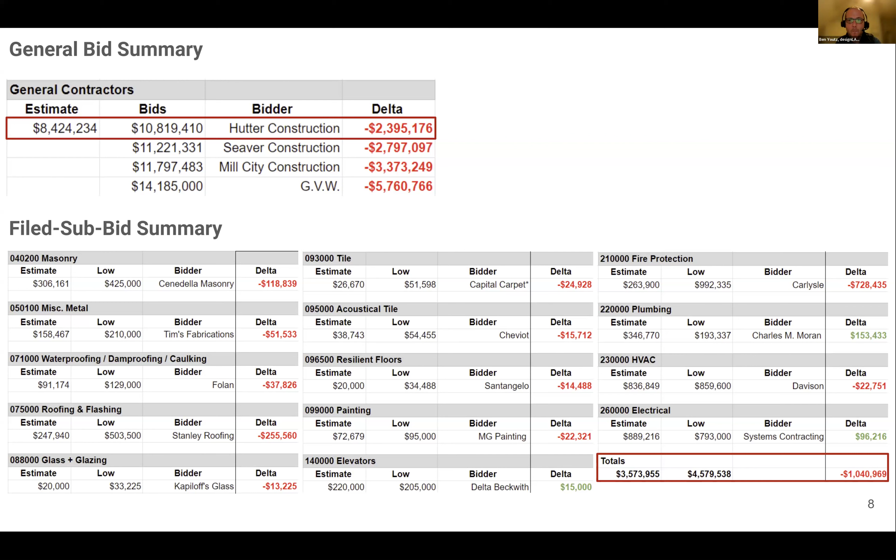We got decent coverage, but on some of the bigger areas of scope, we did not get great coverage, and we only had one or two bidders for some of the larger components. The sprinkler was one of them where we only got one bid. You can click forward, please.

So the biggest... oh, sorry, one back. Thank you. Yep, thank you.

So the biggest factors on cost, I think it's a very selective bidding market out there. Some folks generally would have bid on this project, but passed because they had a backlog of work. It's a small project in the grand scheme of things, only 9,000 square feet. It has a very limited economy of scale, even though it's a smaller building. Every trade still needs to touch it, and it's so small that there's not a lot of opportunity for economy of scale. I think the fact that it's a historic building and a renovation of a historic building inherently drives costs.

We've heard across the board, industry-wide, that there's a really limited labor pool. So even in areas where you would expect really competitive bids, like drywall or painting or some of those other trades, because there's a limited labor pool, all of those components of the project are also being driven by higher bids.

I mentioned the specialized mist fire protection system that has driven the cost up. That bid came back over 3 times what we anticipated, and we only got one bid. That suggests it's a specialized system. Not a lot of people know how to install it, and they're throwing large numbers at that component of scope.

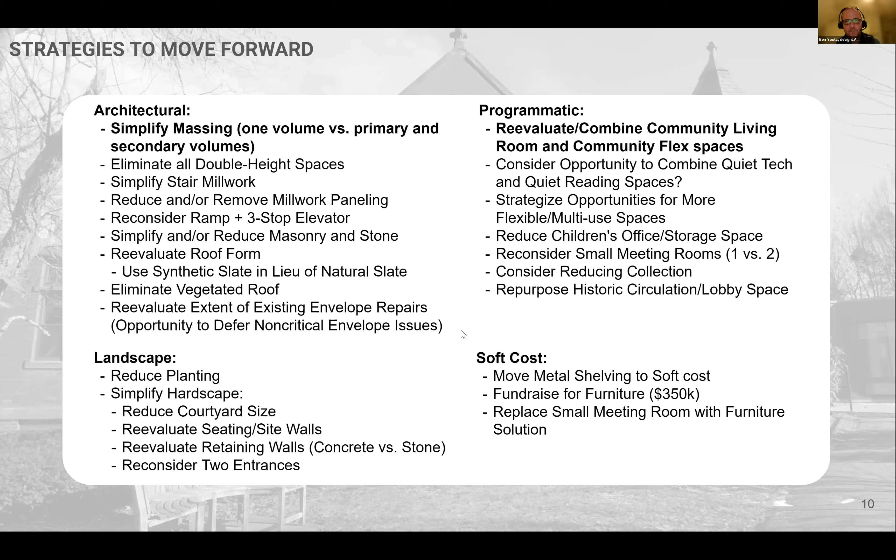As I mentioned at the very beginning of the meeting, we are meeting with our cost estimators. There are 2 on the project later this week or early next, and we'll be evaluating all of these things with their expertise to figure out a path forward.

So we're going to go through a few plan options here. These are mostly examples of what we've been working on and ideas about how to actually significantly reduce the cost. They're split into 2 options. We're not going to go through every aspect of every single one, but we're going to look at them holistically.

So here's where we left off: the plans that we submitted for bid. They had a very wonderful wish list of items. It was a very nice plan, and so we took these and tried to instill the integrity of them once again, and walk away with something that may still function in a very similar way, but with less of those extras. So as a baseline, we are basically removing all double height spaces, removing the ramp, and consolidating vertical circulation.

With the reduced square footage, we're able to reduce the number of restrooms down to 3. And then we're moving some program around, moving the break room, reducing the size of the children's space as limited as we could, but it still does require significant reduction, and replacing one small meeting room.

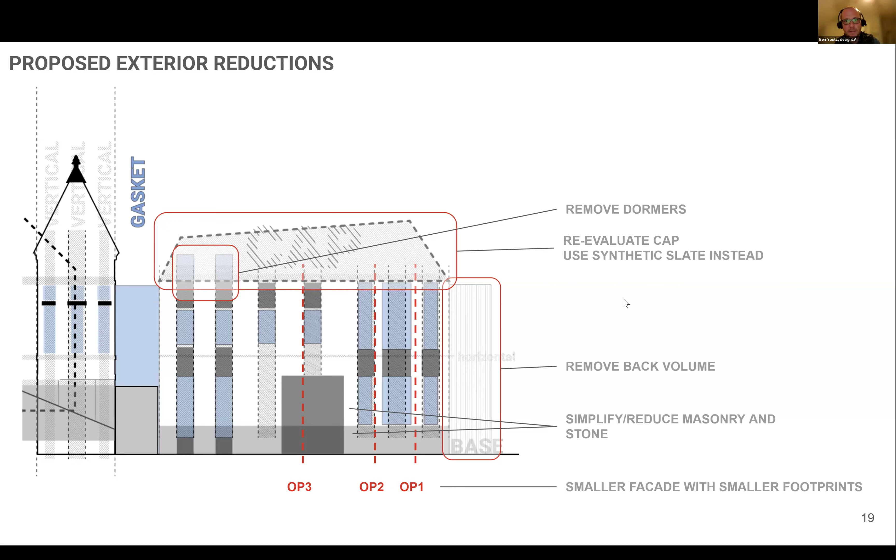However, we think there's opportunity to simplify its detailing. We think we can eliminate dormers that were being considered. We can reevaluate the roof form to find more economy. And anything other than the primary facade, especially once we simplify the footprint and the volume, we'll look to clad like we did in the previous scheme, but there would be more of it, of a more economical cementitious siding type cladding.

Can move forward, please.

Alongside this, we also need to reevaluate all of the landscape decisions and strategies that were made. So with the building footprint likely getting smaller, that can lead to adjustments in the landscape strategy.

We think we can simplify what was a sloped walkway to the historic entrance and change that to a ramp, which is sort of a technical change, but it just makes it a little bit of a steeper slope. It's still ADA accessible, but it can simplify the amount of concrete work and retaining wall and switchbacks that we need. We also think we should consider removing parking along Crescent and relying on the parking on Common Road.

We can narrow the historic entry staircase up a little bit. It's 10 feet wide now. We think we can get it reduced comfortably down to less than 8 and still be impactful.

And then around the addition, we think we can limit and reduce planting and hardscape, potentially retain more of the existing trees because the footprint is smaller. So there are all sorts of things that we think we can evaluate from a landscape perspective as well.

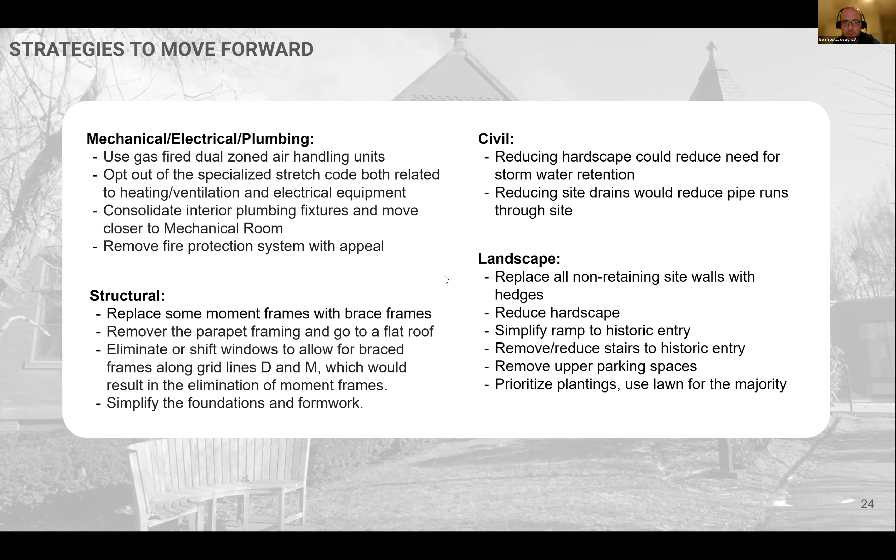And there's some structural components that we're evaluating as well, to reduce and simplify the structural frame of the addition. And then all the landscape stuff you see here, I just described on the previous slide.

So that's really the sort of summary of our presentation this evening.

Just wanted to show the schedule again, because we're meeting with our cost estimators, which will be a critical component of our process, happening later this week or next. Then we're back with the building committee the week of January 22nd, where we hope to come with clear recommendations on how to proceed, so we can get feedback and have a discussion, and then hopefully advance into redocumentation in February, and rebidding in March or April.

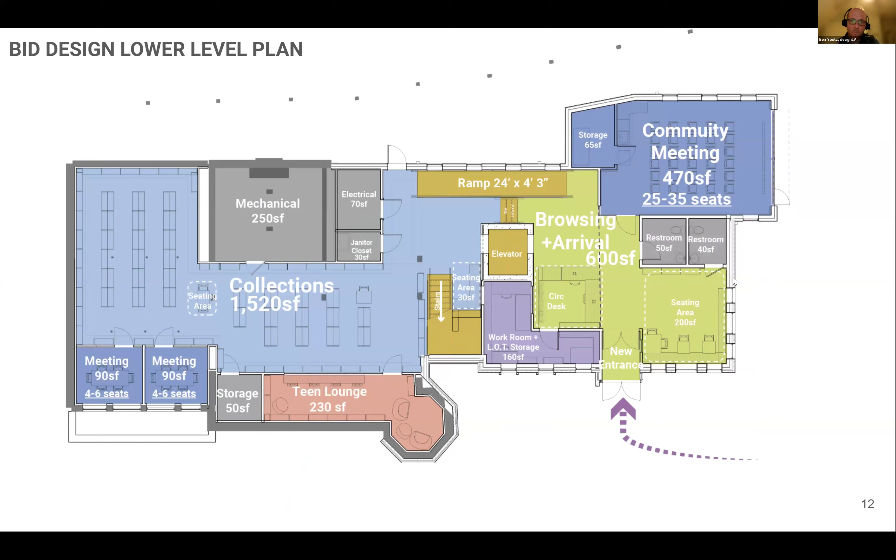So you may remember the larger double height space. When we say double height, we mean two stories tall. We had imagined, Andrew, if you click back one more, in that seating area of what we were considering the lobby or entry lounge, we were considering that being two stories high, which carved out some space within that children's area. So I think we would still have around 9-foot ceilings if we don't have that, maybe even a little better, because we're still proposing that the addition be built lower than the lower level of the existing building, because the floor to ceiling in the existing building's basement is so low that we want more relief.

That would be one of the spaces that we would eliminate. And then there was a little pocket of space near that elevator that was supposed to create a bit of a view out to the exterior and a double height moment at the bottom of the ramp in the previous design. But those obviously take up space and square footage, and if we can reallocate those to program, that's what we're proposing to do.

Okay, great, thank you. Next question: we're thinking that perhaps rebidding will result in lower numbers based on the time of year and everything. So is the plan that we're going to both reduce drastically as well as rebid, which, if I'm thinking optimistically, could that result in a situation where we actually could add some things back in if the price comes in lower? Or do we think that's just not going to happen?

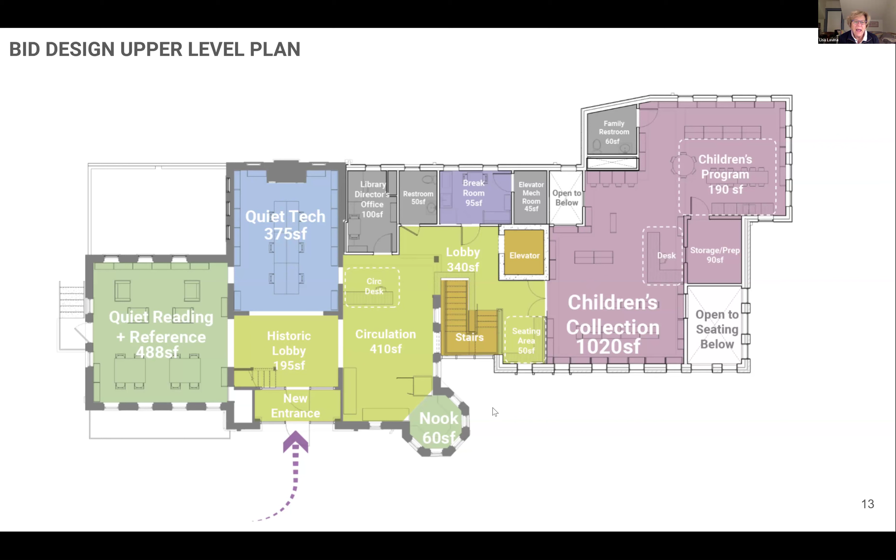Thanks, Tina. I just wanted to voice my appreciation also for the work that's gone into this. Everybody's very frustrated, and I think just let's keep going forward is the right approach. I love the idea of the two separate buildings, and just wanted to voice that perspective.

And I was wondering if you could say a little bit more when you were talking about the exterior landscape relative to restoring the original entrance, that you would be making the stairs wider. What else would change about that from what you know right now? I understand nothing is completed.

Actually, Andrew, maybe click back to the current scheme. So sorry, these aren't rendered and illustrated similarly. There's a lot of sausage making going on here. But we actually proposed, Lisa, narrowing the stairs. Right now I think we've got them at 10 feet, and we're proposing to narrow those to 7.5, 8 feet, just to get a little bit of concrete work and stonework out of there.

And then the zigzag, what was a sloped walkway on the left there, that was a gradual sloped walkway, and we're proposing to make that a ramp, which is just a little bit steeper, still ADA accessible, but it reduces the amount of concrete work again.

Okay, so the walkway to the entrance is being narrowed, and then it looks like that apron right at the doorway is the original size roughly, within the form of the arch? Yeah, I think that's about right. So there's a bit of a landing area there. Sorry, I'm being taken over here. One moment. Andrew and Audrey, can you take over for a sec? Thanks.

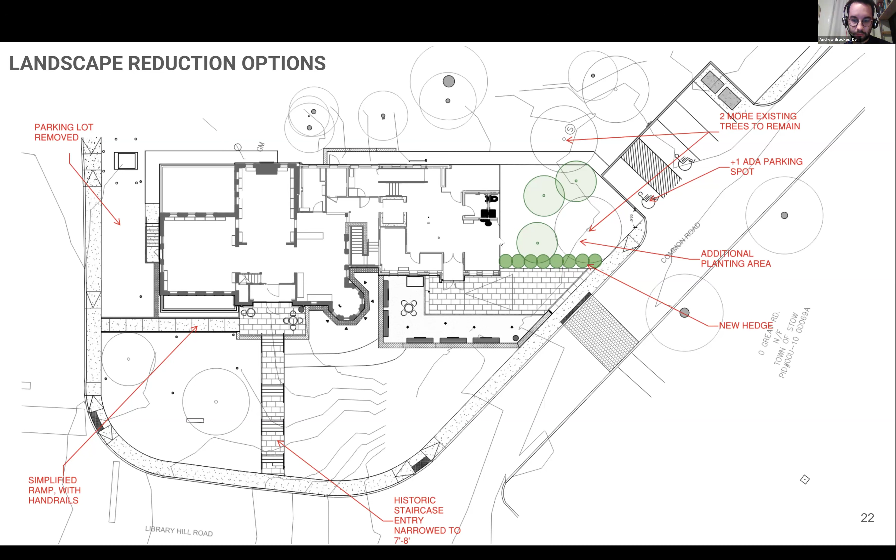And there are additional cuts as well that are made here. With our landscape architect, we're also looking at what's really necessary. We are maintaining the walls that were retaining earth, but what wasn't retaining earth in this old plan, we're removing and potentially replacing with something that's still somewhat of a visual barrier, like planting or shrubs. Not shown in this plan, but that's what we've discussed. So you can actually see it here, blocking these pavers with bushes or a new hedge.

And then that has a compounding effect as well, because we would need less hardscape, which means less civil work, since we wouldn't have to bring water to the sewage. It would all just infiltrate into the ground. So those are the overall ideas we're considering with landscape, and this plan is how we're starting to implement it right now.

One last question you may not know the answer to, or maybe Denise knows: if the design is significantly altered from what was originally thought, what's the process within the town for vetting the idea or design?

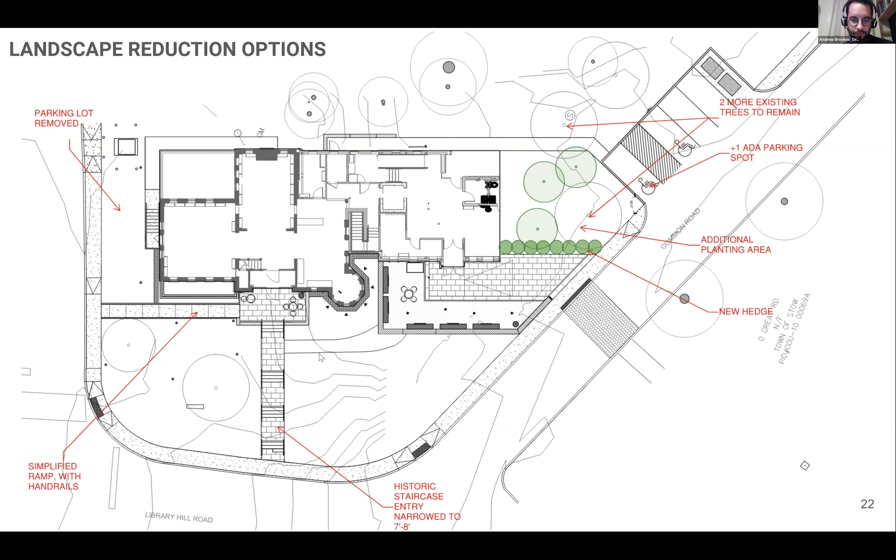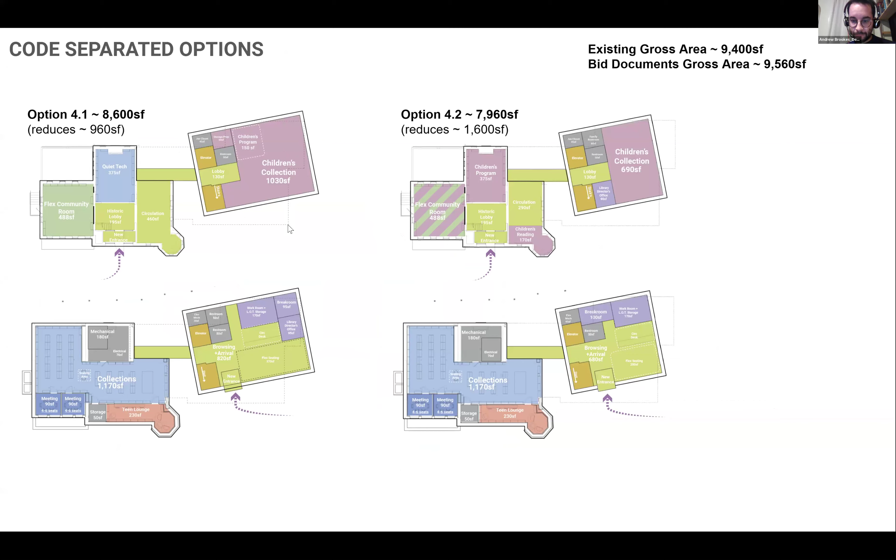I can start this, Denise, if you'd like. We've talked about this a little bit, and that's actually a reason why some of our plans look the way they do. If we can maintain the existing footprint of the proposed building, then we do not need to go back to zoning. But if we have a more drastic footprint change that dramatically leaves the footprint, we may need to report back. So yes and no.

I think either way, we will need to go back to zoning just to give them an update on the changes. As you'll recall from that meeting, they weighed in quite a bit on parking, the entranceway, and the historic entrance. If we're making changes to those, I've spoken with the planning department, and they think as a courtesy we should let the ZBA know those changes are made. If we are outside of the variance, we may have to ask for another variance. So the goal is to stay in the approved footprint and not need to amend the variance request, but either way, if we start making changes, we will have to at least let them know.

Okay, do any other building committee members have any comments or questions right now? I don't see any. I do want to ask, I see Barbie has her hand up, and because the trustees are custodians of this building, I do want to hear her comment or questions. So go ahead, Barbie.

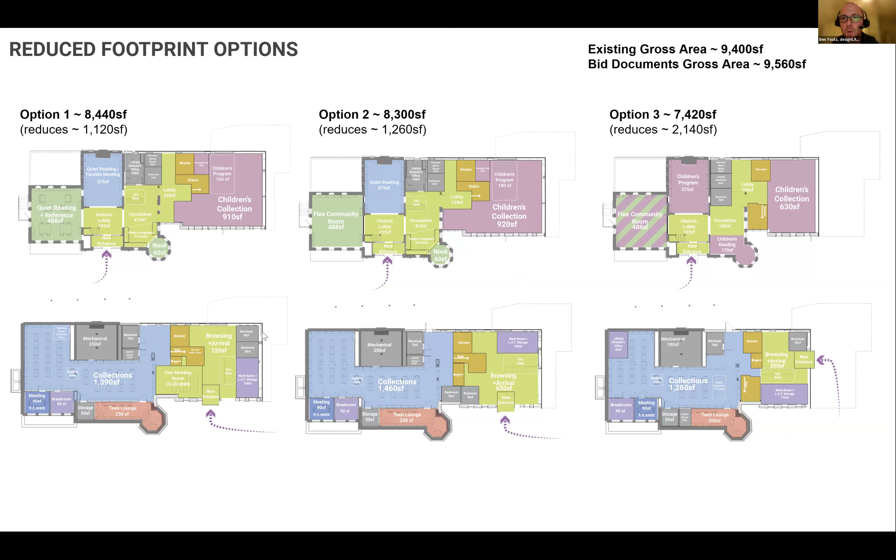Ben, we're not hearing you. You're not muted, but we're not hearing you. Can you hear me now? Yes, yes. Oh, weird, sorry.

Sorry about that. We're not suggesting that we are going to be charging. It is not clear language in our contract one way or the other. We're as disheartened about the bid results as any of you, I'll be very clear about that. We've worked very diligently and hard on this process for over two years now. It is not a position we want to be in or want to put any of you in. We need to evaluate how long this effort's going to take. It is not black and white in our contract that we are or are not allowed to be compensated. If we can get through this efficiently, we may not request to be compensated. If it takes months and months, then we probably would. We haven't had that level of conversation yet because our focus is on trying to get the project to move forward.

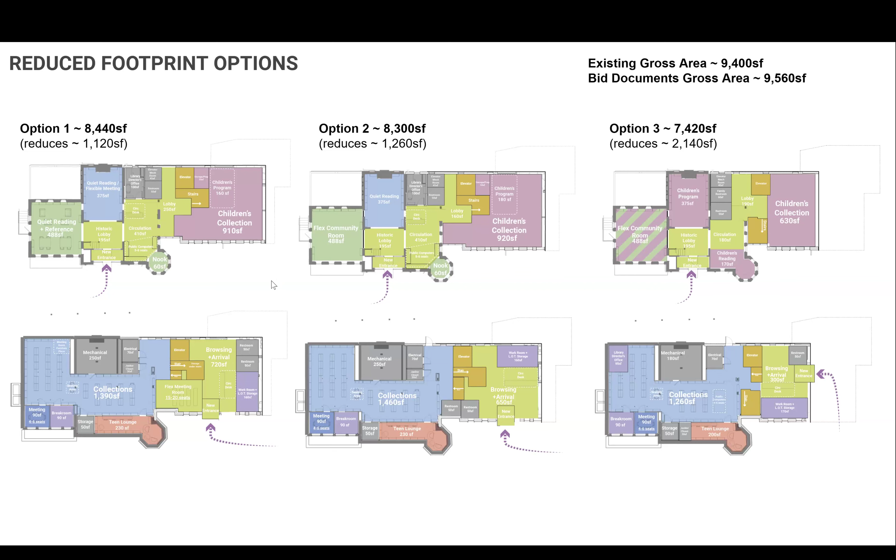Sorry, one more follow-up based on some of the comments. In terms of the square footage, like what Morgan was saying, if we do that, that appendage kind of separate building, is that a big loss in square footage or not? Okay, it reduces by about 1,000 square feet. And that you guys just did based on the variance, like I'm assuming when you say variance, you mean you had to go to the zoning board of appeals because you were close to the property line, so there's a certain distance you can't get any closer to. Am I understanding that correctly? Correct.

So the size of that building is based on that. So if you brought it more forward or adjusted the angle slightly, the size of that rectangle or square could change. I would say that nothing in these plans is set in stone. Even the square footages are based on program requests and overall gut check feelings, if you will. They are still significant reductions in square footage, but we haven't had the ability to explore these options nearly in depth as we have the previous design. So there would be a lot to review with these. I just want to make that really clear. Right now these are somewhat proof of concepts that we still need to look into a lot. We haven't found exactly a cutoff that says we can't do it, but there is a lot that would need to go into researching these options.

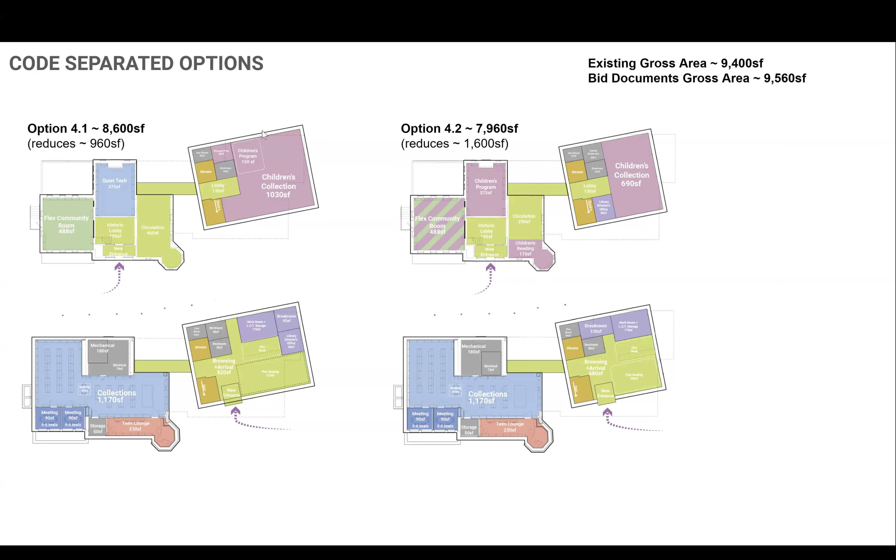The biggest constraint is it has to be under 5,000 square feet combined, top and bottom floor. Is that correct? Exactly. Both buildings will have to be under 5,000 square feet total gross, which means to the exterior of the wall.

Thank you, Andrew, for explaining all that to me. Thanks, Kat. Aisha.

This is recognizing that if this two building option is even an option, all of the places where things are could still change. It looks like the community room moved over to the historic building in both of these options, and there are no restrooms in there, and it doesn't look like there's a way to go up or down there. So I wanted to confirm that doing that would mean after-hours programming wouldn't have access to restrooms if they're in the other building, and there would be no way to go up or down within the building. Is that right?

In these plans, yes, but that's something we would have to look into and seriously consider how that would operate. As we've been looking at these five plans, we haven't been able to consider every single request that we were looking at before. Of course, thank you.

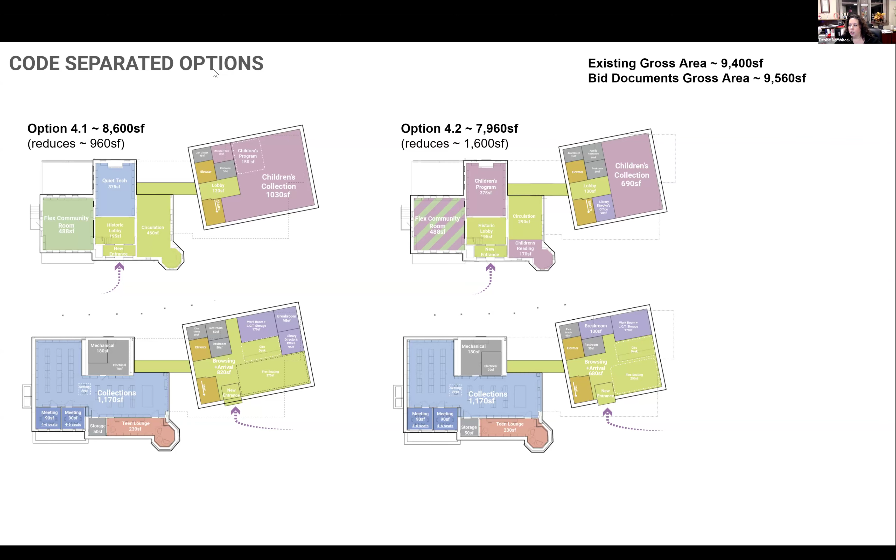I believe the next thing is our invoices, so review paid invoices and approve any that have come in. I sent out the spreadsheet to the committee members this morning. There's nothing that needs to be reviewed because the committee previously voted to allow me to put forward anything under 25,000, but here's where we stand as of today.

I got a Colliers invoice this morning, so you'll see the ones with an X are the ones the building committee has actually voted on, and then there's the ones we reviewed at our last meeting. The list is on our website under the building committee project page, but that's where we stand with invoices since our last meeting. There's nothing new that needs to be approved.